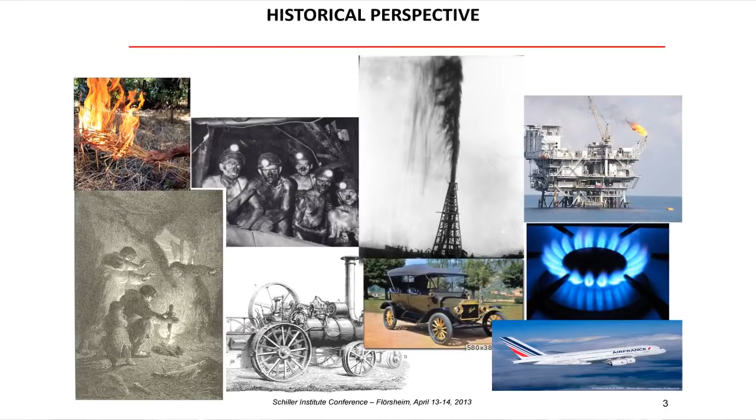Good afternoon. I would like to show you this afternoon why nuclear appears really unavoidable in the long run. First, if we take the historical perspective, you know that energy has always been important for humanity, and we started using biomass for a long time. So biomass was the first we have been using since very, very long time ago.

When coal was discovered in the 17th century in England, it really changed our world because it led to the industrial revolution in the 18th century. Afterwards, of course, discovery of oil in the 19th century led to the tremendous growth we have in the world in the 20th century, and this eased basically all connection and transportation in the world.

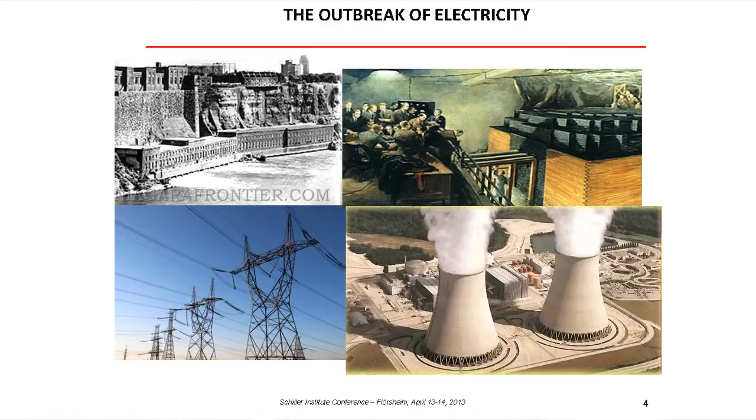Afterwards, liquefaction of gas in 1956 also caused a big burst in the energy use we are seeing today. At the same time, when we started using electricity at Niagara Falls, this was an astonishing use of energy—transportation of energy over long distances using only a small copper wire. This led to the use of energy over long distances.

Everybody knows that in 1942, Fermi built his first pile in Chicago Stadium. This was very astonishing—for the first time he could extract energy from uranium. This has also been expanded in the late 20th century.

So just a few basic figures, to have in mind the amount of energy we are talking about. Of course the official unit is joule, but the more common unit is kilowatt hour—this is what you use every day. One kilowatt hour is 40% of what we need per day for a human body, but it's only enough for driving 1 kilometer in a car. So it's a fairly good amount of energy.

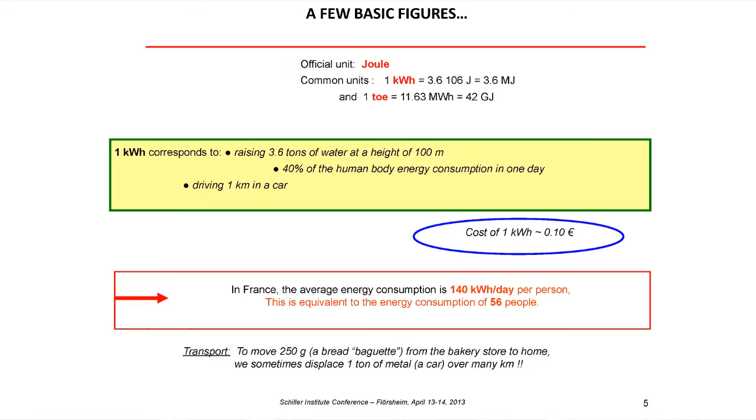For example, if we just want to go and get a baguette at the bakery store, sometimes we are moving 1 ton of metal over kilometers just to move 250 grams. So one point I wanted to stress here is the efficiency of using our energy, and this is very important.

Another thing that has been discussed over the centuries, especially by James Joule, is that energy, in fact, doesn't appear from nothing. It is only converting energy from one form to another. Energy doesn't disappear—energy is a conservative physical unit. What we are doing when we use energy is just moving one form of energy to another form of energy.

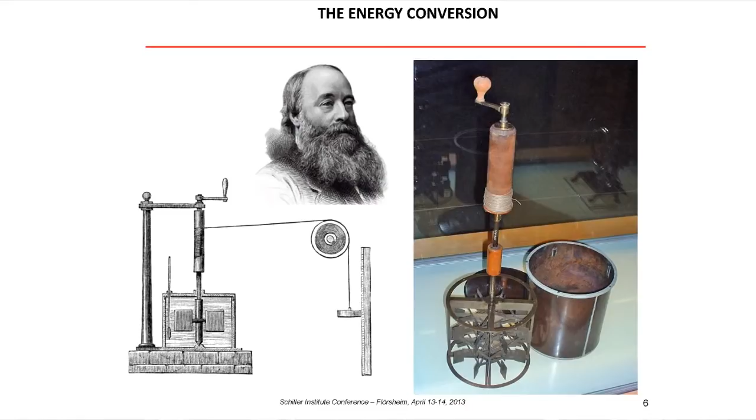This is what Joule showed with his small apparatus, where he had a small mass falling with gravity. This mass is connected to a small water loop where we have paddles rotating in the water. He showed that energy from gravity is transformed here into heat in the water, and he measured the temperature. This is how we determined that we need 4.18 joules to heat 1 gram of water by 1 degree.

After that, the idea has been to convert energy from one form to another, and we invented a lot of techniques to do this conversion. Of course we have thermal energy that everybody knows, chemical energy, electrical energy, mechanical energy, and radiation energy, nuclear and hydraulic.

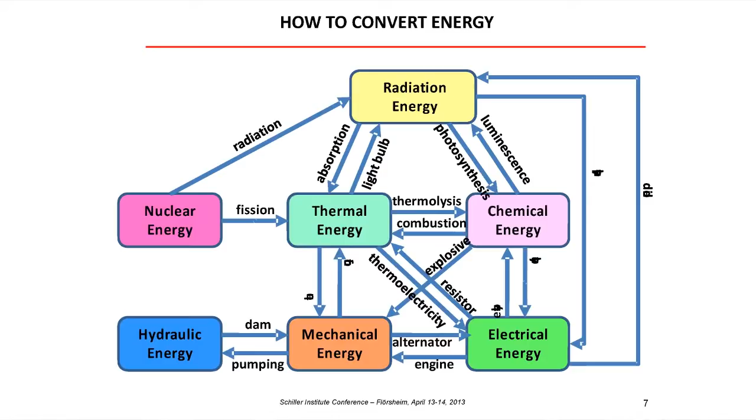For example, when you have light in a lamp, you're taking electrical energy in a resistor, heating the resistor, going to thermal energy, and then this thermal energy is at a sufficiently high temperature to produce radiation energy. So you're moving from one form to another. When you do that, the overall efficiency going from electrical energy to radiation energy is only 2%—meaning you're losing 98% in the process. This is why it's important to have efficiency in the process.

When you're using nuclear energy, you're going from nuclear material to fission, producing thermal energy, going through a turbine, heating water, mechanical energy, and then going to electrical energy in an alternator. So you're moving through these 4 forms of energy to arrive at electrical energy.

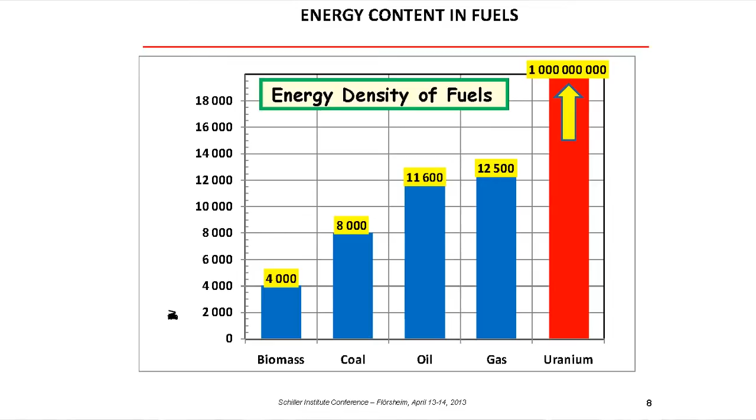The other main issue here in using energy is density, is energy density. When we discovered coal was very interesting. Why? Because it has 2 times the energy density of biomass. And this allowed us to make trains running on steam, because we could put enough coal in a train to move the engine.

And when we discovered oil or gas, which is the most dense energy that we know for the moment as chemical energy on Earth, it has been even more used and sought for because it is even 3 times more dense than biomass. And what is important here is that uranium, because it is nuclear binding energy, is 100,000 times more dense than petroleum.

From this fact, I think it is clear that we need to use this tremendous density of energy. This factor, 100,000, is very important because we can use very little mass from the Earth to get the same amount of energy as burning oil. 100,000 - you have to bear in mind this figure of 100,000. This simple fact tends to say that human beings will be using nuclear energy in the future as their main source of energy.

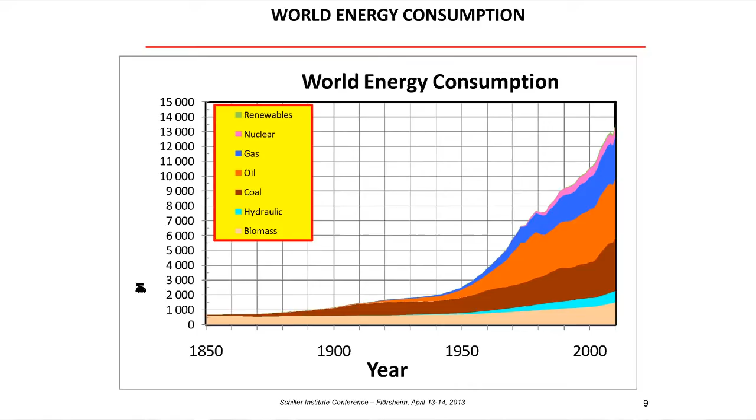What is important in this figure is that through the discovery of different energies, we never left over other energies. There has never been substitution of energy - there has always been adding more and more energy to what we know. You see that even today, biomass, the oldest use of energy from humanity, is still increasing. Coal is still increasing, petrol and oil also. And by the way, you see that renewables here in green are less than 1%.

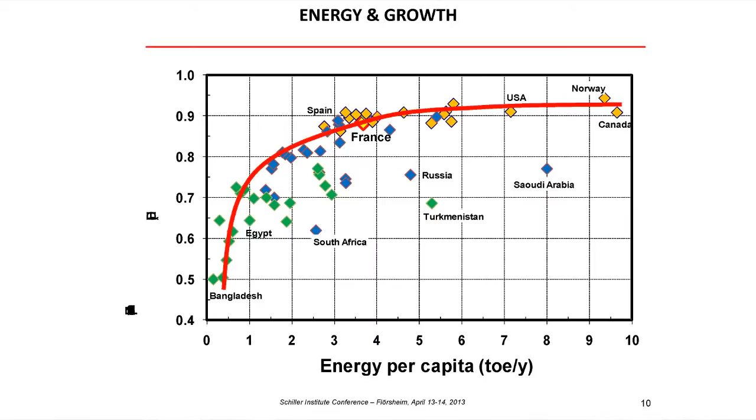So all these energies are increasing, and people are asking for more and more energy. Why? Just because energy and growth are intimately linked together. We cannot get human development without energy. It is clear that if a country wants to develop, it will need enough energy per capita to develop, in order to be on the right side of the curve, which is the developed countries' side.

So many countries in the future will have to develop to the level of the wealthiest countries, and will have to have at least 4 tons of oil equivalent per capita in order to be sufficiently developed. This means we can foresee right now that most of the world's energy consumption will continue to develop in the future.

Now, I will skip this electricity prices issue and go directly to the energy sources. So if we want more energy, where can we get it on Earth? As you know, we have fossil fuel energies that we've discussed - coal, oil and gas - and we have renewable energy: hydraulics, wind, solar, biomass, geothermal.

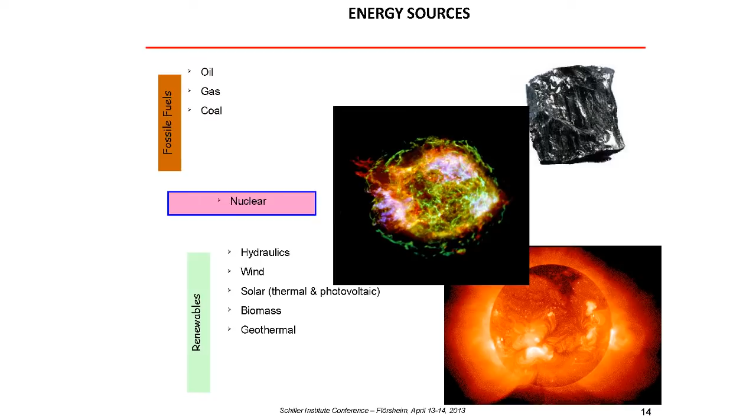Most of the renewables come from the energy of the sun's radiation, except for geothermal. And we have nuclear energy, which was formed at the beginning of the formation of the Earth, 4 billion years ago, where uranium was formed from the beginning in the Earth's crust. So these are very long timescales - we needed a very long time to form these kinds of fossil fuels, 100 million years.

These are basically diffuse and intermittent energy sources. So we need something that can last sufficiently long as a resource, and we need something that is not intermittent and diffuse, which has sufficient energy density to produce enough power.

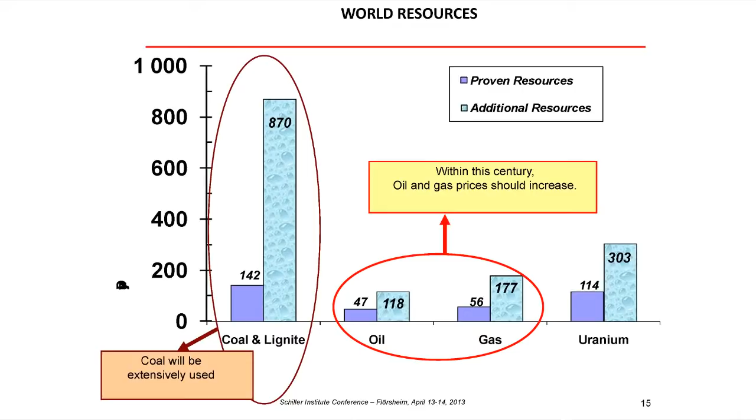If we look at the resources, the present world resources - basically oil and gas resources, if we add even additional unproven resources, will probably last hundreds of years. This means that in this century, these will be very, very expensive because they will be rare. We will have to get them deeper in the ocean or further away to access these resources.

Coal is more common, and we have much more coal on Earth than we have oil or gas. So basically, coal will be extensively used, and it is a resource used now, essentially in China. It's a basic resource in most countries now - coal.

If we use uranium as we are using today in present reactors, we only have 300 to 400 years of resources. So this means that if we want to use nuclear energy over a longer period of time, we will have to use new kinds of reactors to have enough resources to last sustainably longer than we do today.

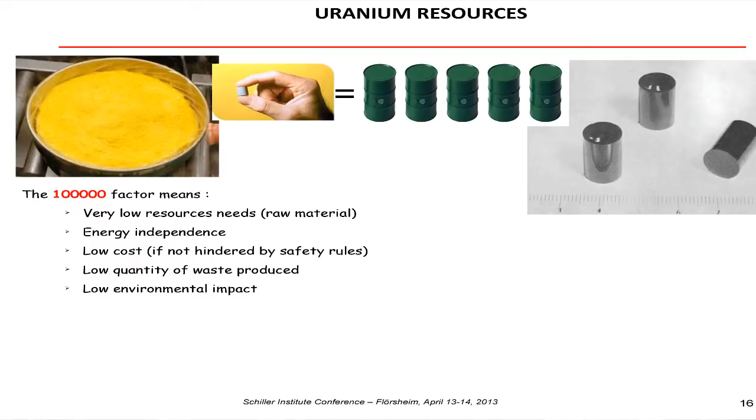Just a few words about uranium resources. Because of this factor of 100,000 I talked about before, for the same amount of energy, this small nuclear pellet we put in the reactor, 7 grams, gives as much energy as 5 barrels of oil. So we need very low resources for the same amount of energy - instead of getting billions of tons of oil, we only need thousands of tons of uranium. This factor of 100,000 is very important from the point of view of the resources we have on Earth to access: energy independence, low cost, low quantity of waste produced, and low environmental impact. We can get into these if we have to discuss more.

So what are the prospects now for the future, for the short future and for the long future? For the short future, we have today to enter a new era where we have to modify the energy use that we are doing today. And some energy rules can really be game changers in energy consumption on Earth.

The first of them is energy storage, very important. Today, we do not know how to store electricity, so we have to produce electricity at the same time we consume it. And this makes for very stringent operational requirements for electricity.

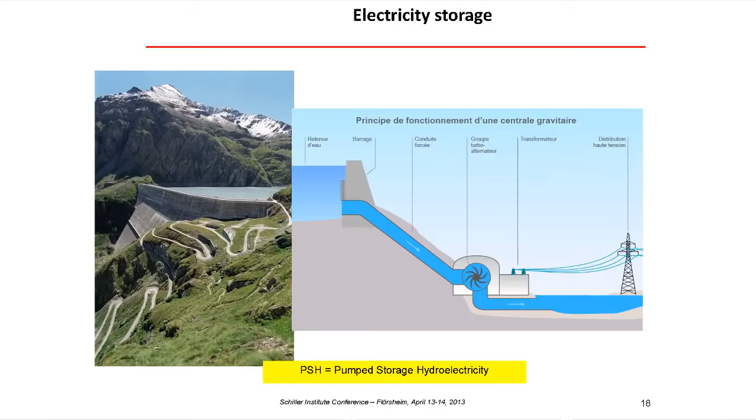So, electricity storage - the only large storage, I'm speaking about terawatt-hour storage, not the small battery of your computer which is 100 watts - the only usable large energy storage is pumped storage hydroelectricity. When you have electricity in excess, you can pump water into a storage at the upper part of a dam, and then when you want to use it, you just release it, using mechanical weight. This can only be done in countries where you have mountains, of course. It's very difficult to do elsewhere.

Other kinds of electricity storage are compressed air storage beneath the ground, inertial wheels where you spin wheels at high velocity and then try to recover the energy, and of course batteries and superconducting magnetic energy storage. All these are studied in the labs, but none of them are applicable at high energy and high power.

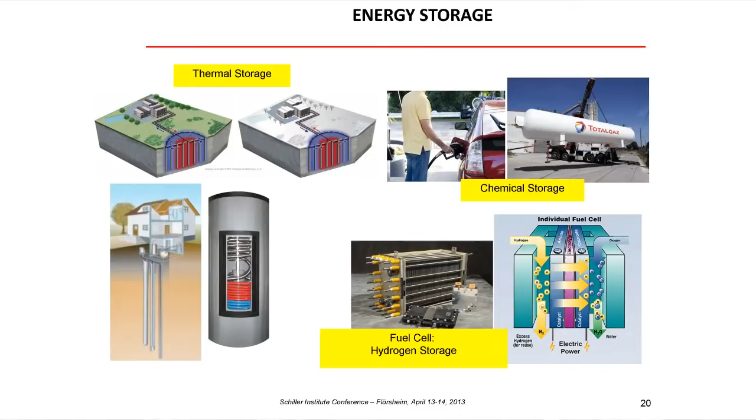Another kind of energy storage is thermal storage. Here you have a house or a complex where you can store energy in summer and recover it in winter. You have chemical storage, the best storage we know, which is the storage in your car, for example. And you have fuel cell storage of hydrogen.

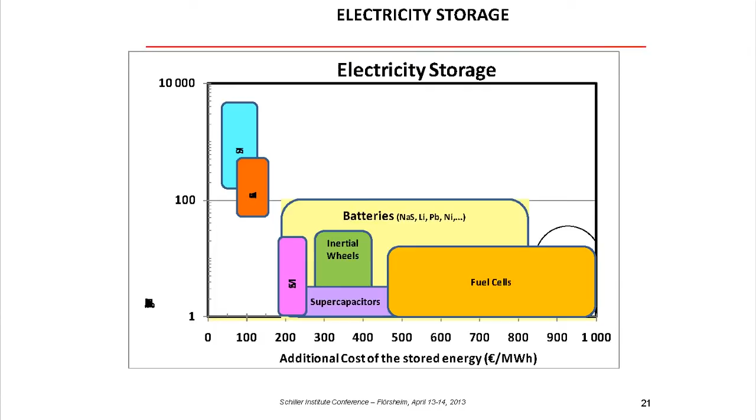But when you put in the figures for all these kinds of storage, what we need is to have enough power in this storage. This is pumped storage hydroelectricity - you want to be in the upper part here, in the 100 megawatt regime, and you want this storage to not be very expensive, so you want to be in this part of the cost range. You see that most storage available is low power and high cost, so there is plenty of work to do to make these kinds of storage move into this range. This is the challenge for the next 30 years.

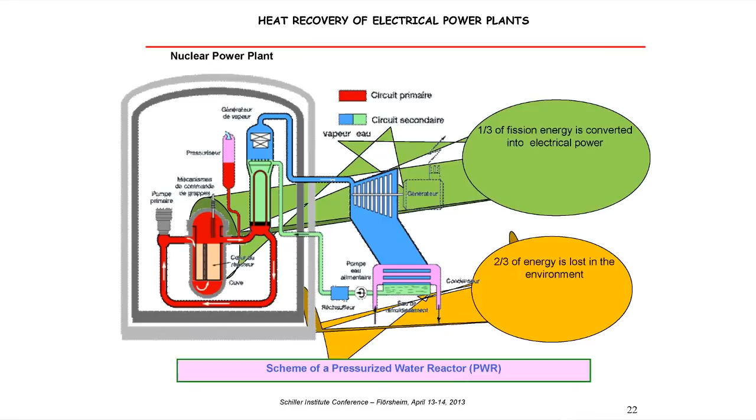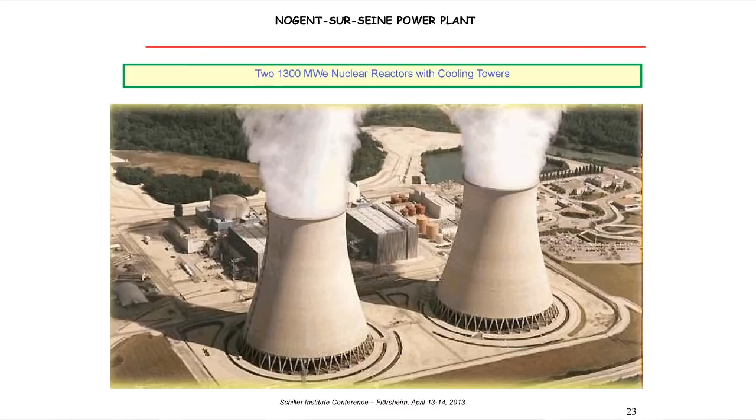The second challenge is the recovery of electrical power plants' heat. Why is that? Today, all we are doing is converting energy from one form to another. When you're producing electricity in a power plant - here, for example, a nuclear power plant - you're heating the primary water in the core of the reactor and transforming it into electrical power. Only one third of the energy released from fission is transformed into electricity, and two thirds is just lost to the environment, heating the birds or heating the fish. This is not very good. Here is one example, our reactors in Nogent-sur-Seine, where you see that all this heat is going into the atmosphere. So what can we do?

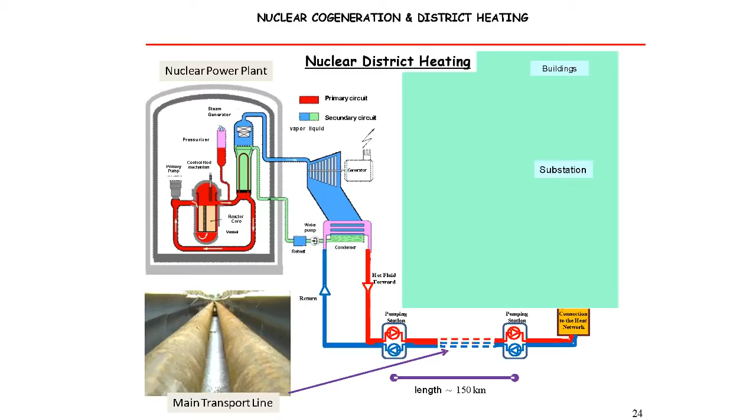What we can do is change the system in the secondary loop of the reactor in order to recover this heat, and use it to heat cities. The problem is that nuclear power plants are generally far from the cities, so the challenge is how to transport heat long-distance, hundreds of kilometers, from the nuclear power plant to the cities. This can be done today with very low losses - we can have a 150 kilometer transport line with less than 2% heat loss.

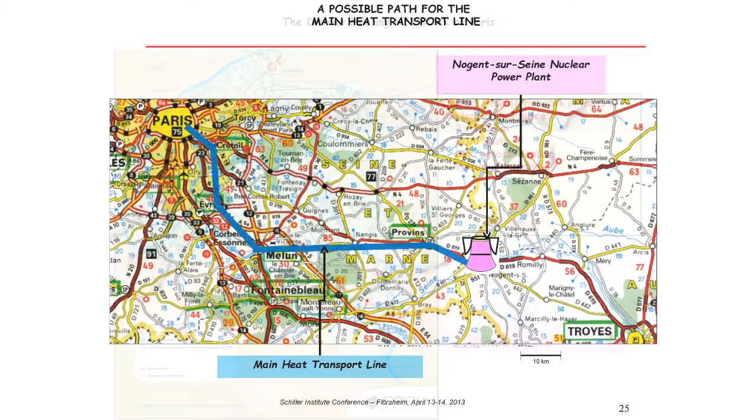We have programs to try to recover heat from the Nogent-sur-Seine nuclear power plant and feed it into Paris, 120 kilometers away. Paris already has a district heating network, the largest in France, which has been there for almost a century. It started with trains at Gare de Lyon, where they heated vapor, and it's still working today. Currently this heat comes from coal power plants in Saint-Ouen or from gas power plants. If we can use nuclear heat instead, this can save a lot of energy and money.

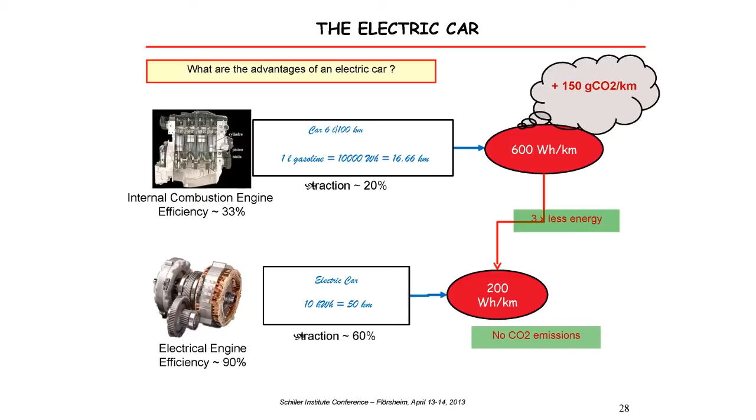The third challenge is electric transportation. Why electric transportation? What are the advantages? If you take an internal combustion engine, you have 33% efficiency in the engine, and only 20% converted into motion of the car. This means you are losing 600 watt hours per kilometer. If you go to an electric car, you only lose 200 watts hour per kilometer, because the electric engine has an efficiency of 90%. So you gain 3 times less energy loss for the same motion, and also you have no CO2 emission at all.

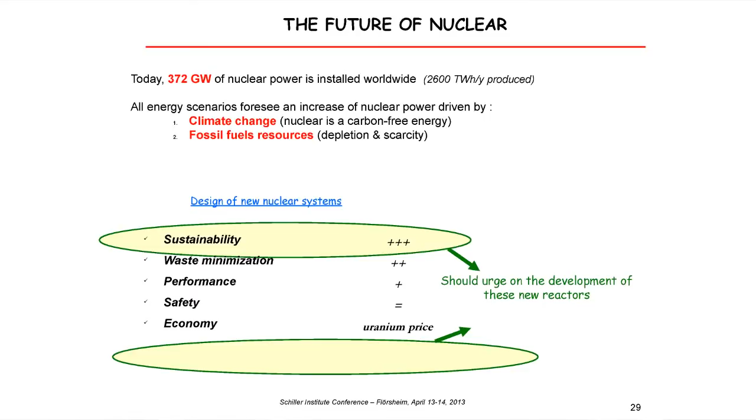The fourth challenge is the long-term sustainability of nuclear. Sustainability is driving the design of new reactor systems, where we are using uranium resources much more efficiently than today - 50 times more efficient.

So we need to do something in order to move to new reactors, what we call fast reactors. If we introduce them early, we can have enough energy from fast reactors to last a very long time - and by long time I mean tens of thousands of years, a much longer time scale than what we have today for our reactors.

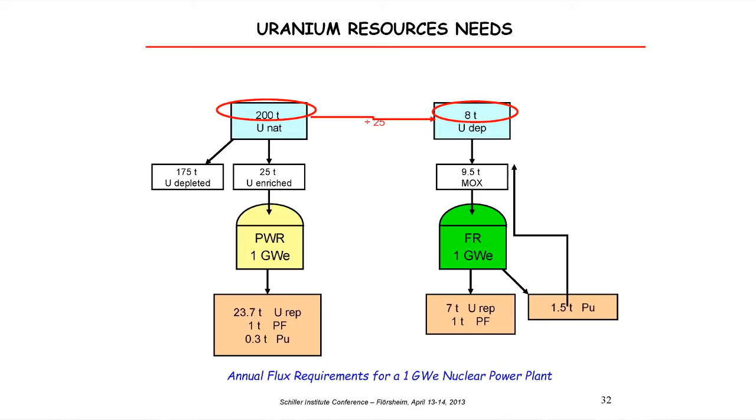The resource needs for fast reactors are only 8 tons of depleted uranium, as compared to 200 tons of natural uranium needed for our present reactors. This means the gain we can get is long-term sustainability for nuclear reactors, and this by itself justifies developing these new nuclear reactors for the long term.

I'll skip the actinides and go to the kinds of reactors people are thinking about today in the world. There is an International Generation 4 Forum that started in 2000, where 6 types of fast reactors have been selected for the future: the sodium fast reactor, the lead fast reactor, the gas fast reactor, the high temperature reactor, the supercritical water reactor, and the molten salt reactor. I think you will hear after me about one of these, the molten salt reactors.

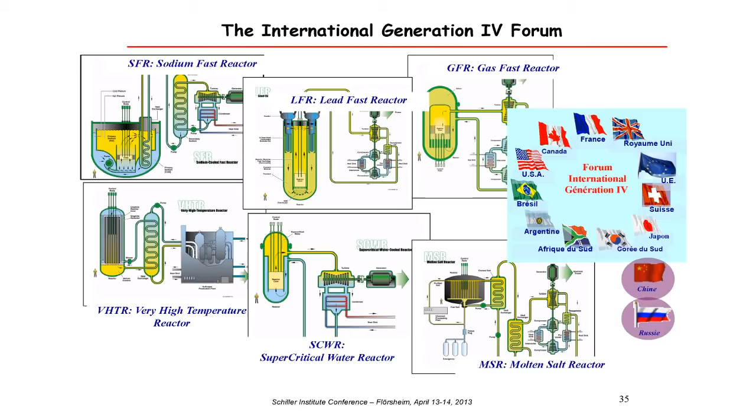Today in France, essentially at CEA, we're working on 2 kinds of reactors: the sodium fast reactor, because we have 30 years of experience working with sodium fast reactors, and the gas fast reactor, which is more challenging because it's a helium-based fast reactor that has never been built until now. A prototype of the sodium fast reactor will be built in the next 10 years in France.

In conclusion, energy density is the key issue for using future sources of energy on Earth, and we need energy because we need economic growth - they are intimately linked. The game changers we see in the next 30 years are storage, electrical storage, heat recovery from power plants, and electric transportation. And for the longer term, I would say nuclear reactors are unavoidable. Thank you.